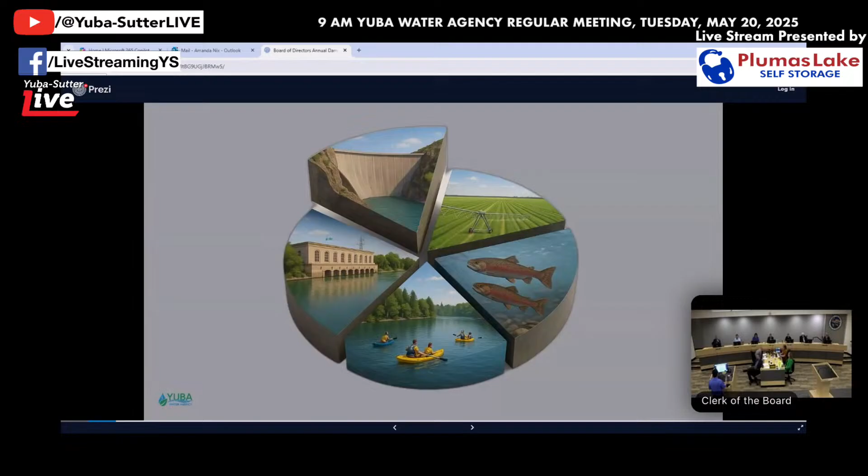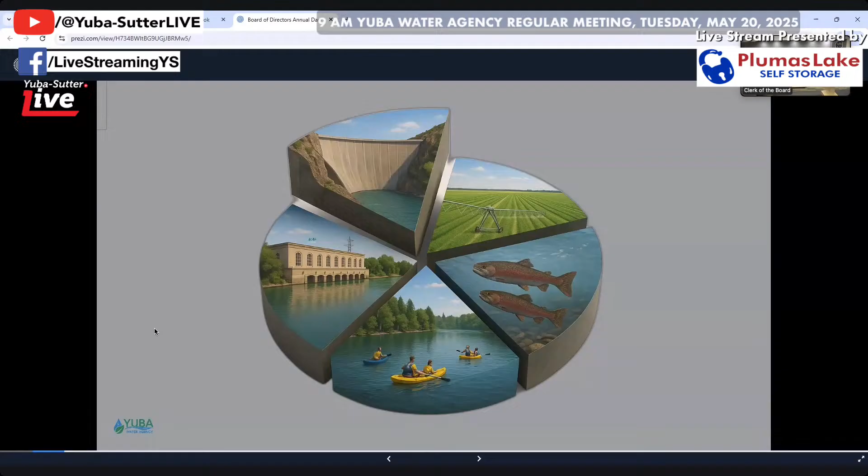This is a fun little depiction of the primary benefits of the agency: hydroelectric generation, recreation, fish enhancements, water supply. But the primary reason, as everybody knows, the agency was built was for flood risk reduction, provided by the dams.

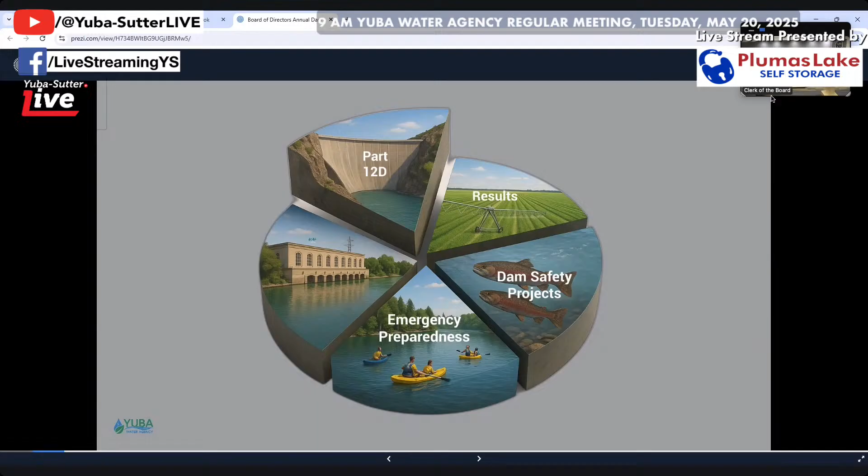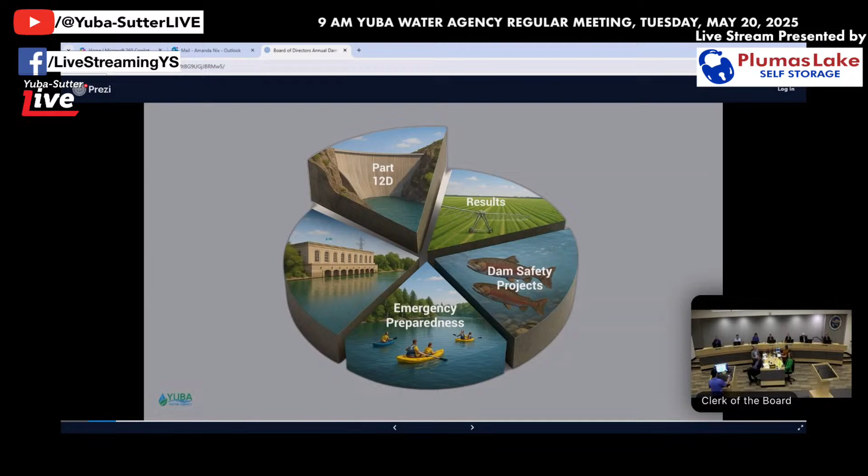So the agenda for today will be for me to review the Part 12D inspection, and I'll go over what that is, the results of those inspections, dam safety projects that have been done in the last year or so, plus future projects as planned, and a quick overview of where we're at regarding our emergency preparedness program.

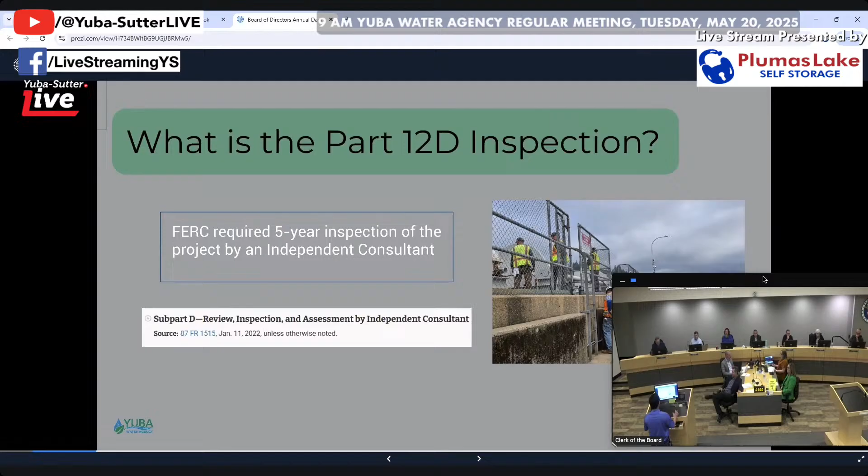So what is the Part 12D inspection? Every year we do inspections required by our regulators: the annual Division of Safety of Dams inspection by the state, the annual Federal Energy Regulatory Commission, or FERC, inspection, plus our own internal inspections. This is a special inspection required by FERC, where we, as a licensee, have to hire an independent consultant, a third-party person or team, to come out and inspect our dams, facilities, and the entire project. It occurs every 5 years, and it's called the Part 12D inspection because it's codified in the Code of Federal Regulations, Title 18, Part 12, Subpart D, hence Part 12D. It's shown there in the picture, looking at the spillway during that inspection.

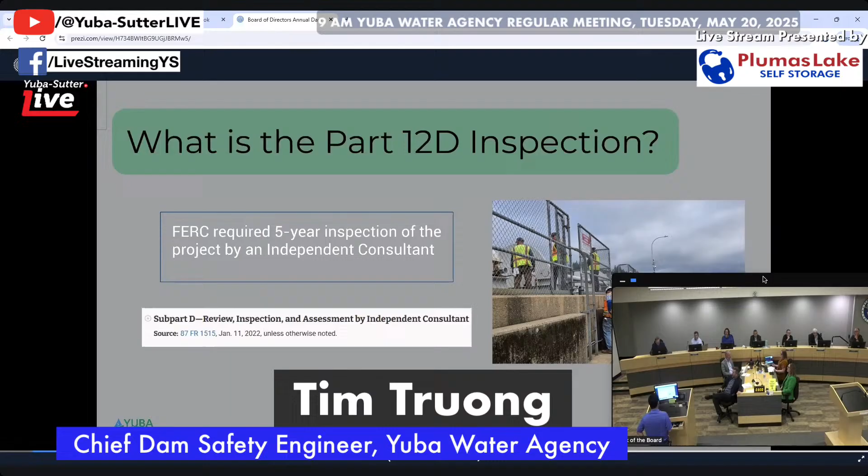What's special about this past Part 12D inspection compared to others is that recently FERC changed how all licensees do this Part 12 inspection. Instead of the previous format, now they categorize each Part 12 as either a comprehensive or a periodic inspection, and those alternate every 5 years.

One year you may have a comprehensive inspection, and the next 5-year cycle following you'd have a periodic. The difference is, as the term implies, a comprehensive means the independent consultant is looking at everything, whereas a periodic is very scaled back, similar to an annual inspection, but done by that third-party consultant.

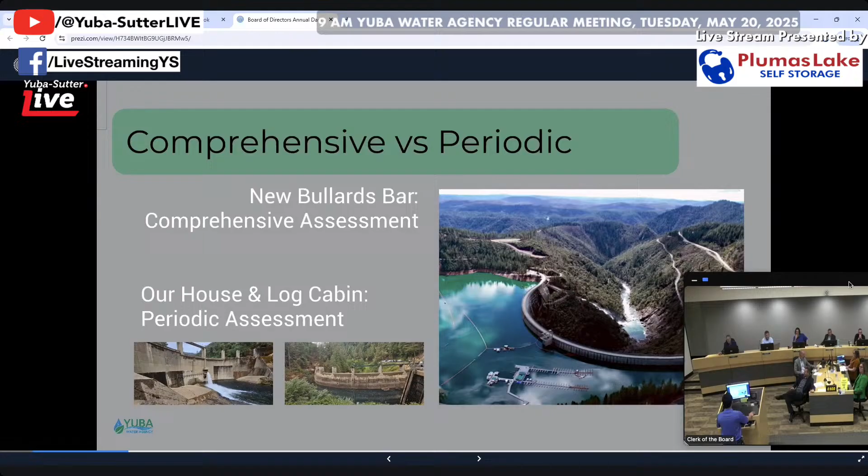For this past year, we did a comprehensive inspection. New Bullards Bar was tapped to conduct a comprehensive assessment. Our House and Log Cabin were periodic assessments, lesser in scope. For the periodic inspection at Log Cabin and Our House, we conducted a regular on-site inspection, but also did a full tunnel LiDAR scan of the entire tunnel for both diversion dams. This is an important milestone because it's the first time those tunnels have been fully inspected in over a quarter century—last time was in 1999. Good to have that information.

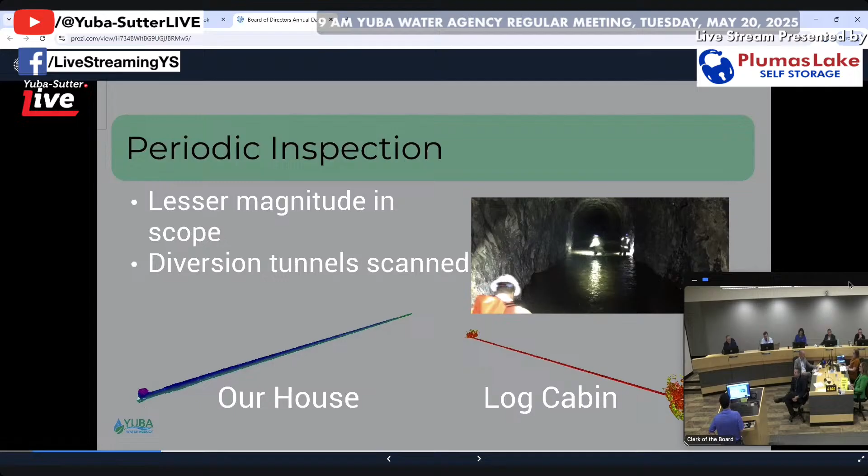The comprehensive assessment is the big one. We received the notice 18 months ago, so a year and a half ago is when we began, but in actuality we started working on it beforehand. Interestingly, based on feedback from licensees, FERC is considering extending that initial notification out to 2 years, 24 months, because many licensees were asking for more time to do this inspection—that's how big and resource intensive it is.

So the IC did a deep dive of the various documentations. It looked back to the design basis and all the analysis and the records that we have on the project. We did a site inspection. We conducted a probable failure mode analysis.

And the big difference between this Part 12 and others is this level 2 risk assessment. So the FERC is moving towards looking at risks associated with the project instead of just failures or failure categories as they have in the past, by moving away from deterministic to probabilistic approaches.

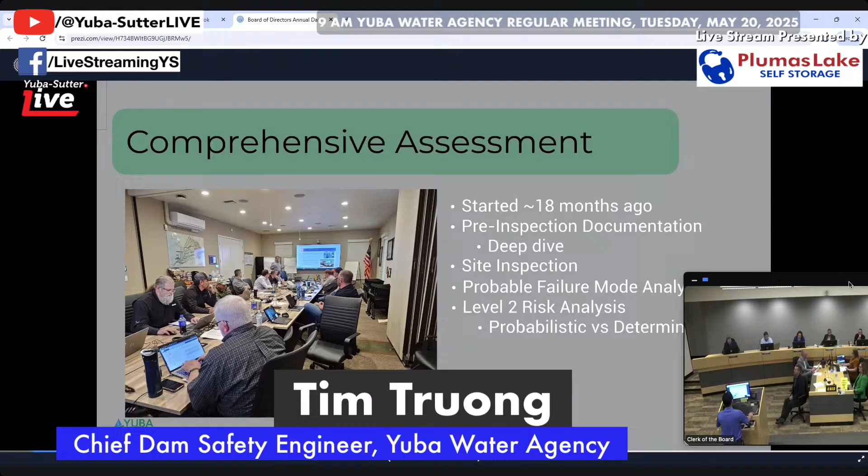And I say this not only to make myself sound smarter, but to also try to inform the board of really the scale of what that entails. Because in the past, when you look at deterministic, it's looking at a single point. So you consider the maximum flood, you consider the maximum earthquake. That's your value when you're looking at a failure.

Whereas in the probabilistic world, those points are just a probability, a single return period, a 1,000-year flood, a 1,000-year earthquake. But we're considering failure and events beyond those, so we consider all the range and spectrum of probability. So that's a lot of work and a lot of data that needs to go into that.

Hence, the amount of resource that's taken to do this work. And just for comparison, for this assessment, for just Bullards alone, this year it's over $1 million. Whereas last time we did it in 2020, for all 3 dams combined, it was about 200,000. So that's the amount of work that we've put into this work.

That's a new requirement at FERC, yes. Thank you.

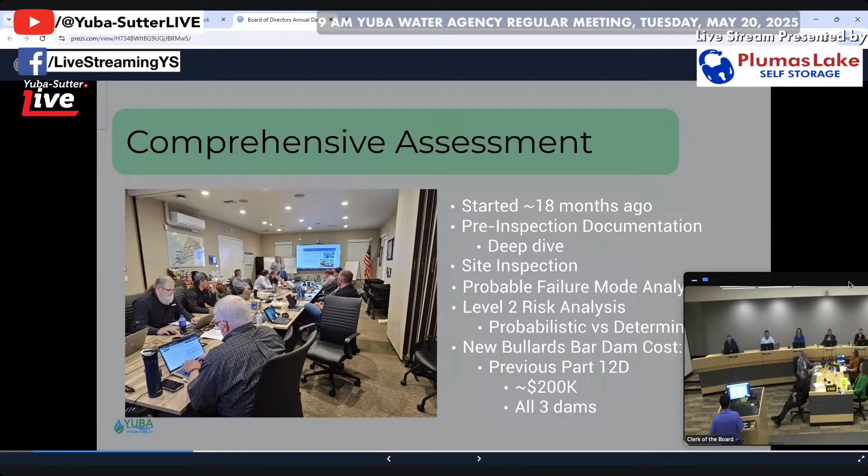Okay, so results. What did we get out of the assessment? So Log Cabin and Our House, this is the periodic assessment. The independent consultants stated in the report, the project is judged as being suitable for continued safe and reliable operations. So project's good for Log Cabin and Our House. There were a few recommendations, minor recommendations that we're going to follow up, but I don't plan to go into details here. If you would like more information on that, I can certainly set up a closed session to discuss those details.

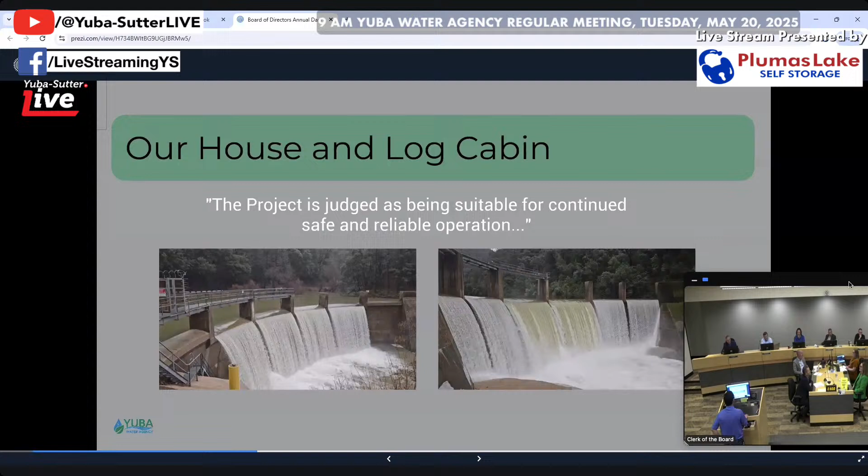Can I ask a question? Is in the dam on the left, is that the low water outlet open? Yes, it is. Actually, it's same. Actually, I take that back. I don't recall it for this picture, actually. I want to say it was because I think we took it during our annual testing, so I think it was, but I have to go back and look at the dates for this. Usually when it flows like this and the low level outlet is open, you can't even see it because there's so much water.

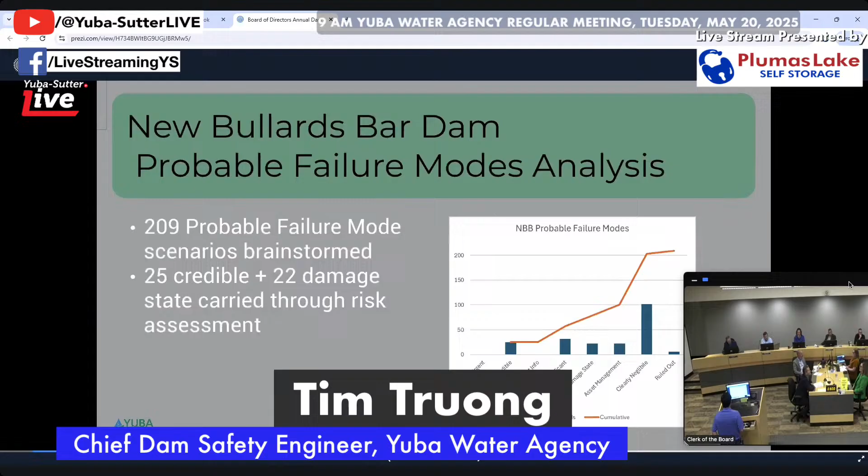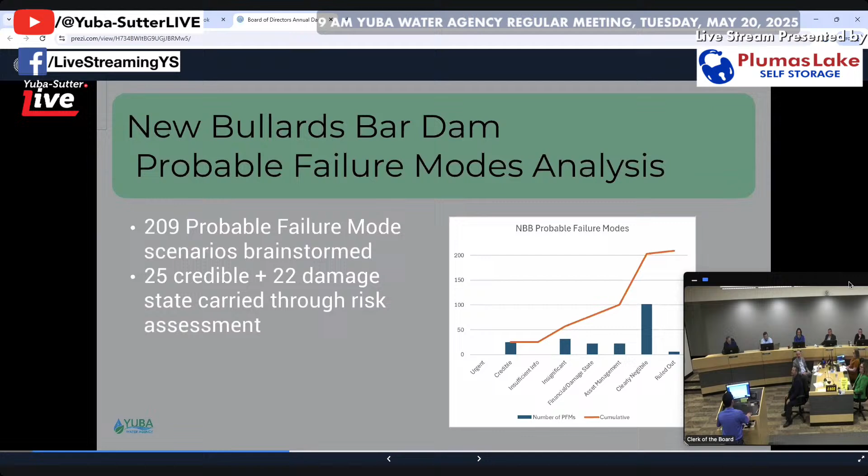So Bullards. For Bullards, as part of that process, we conducted the probable failure mode analysis. This is where a bunch of experts sit in the room and talk about all the ways the dams can fail, which as the dam safety engineer is one of the most harrowing experiences of my career, where all the experts talk about how your dam is going to fail.

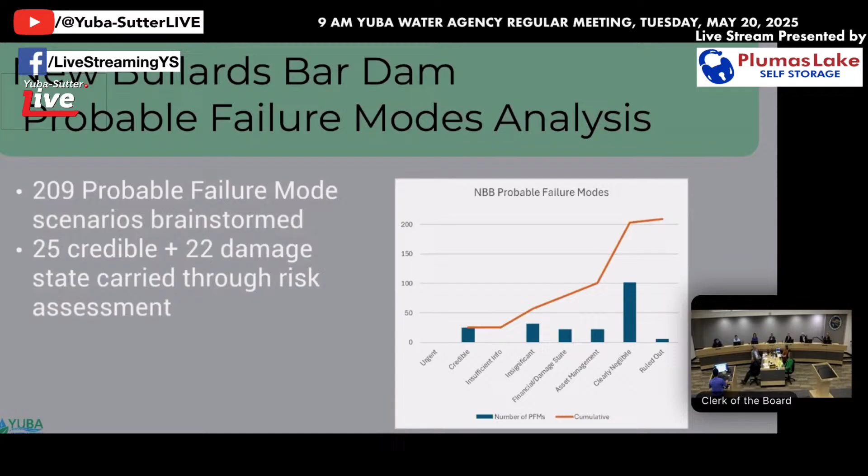We postulated 209, we brainstormed 209 different failure modes, which is a lot. All those 209, 25 were considered credible, and 22 were considered a damage state scenario to be carried forward through that risk assessment process. And you can see that chart there, just the cumulative, all the categories associated with the different failure modes.

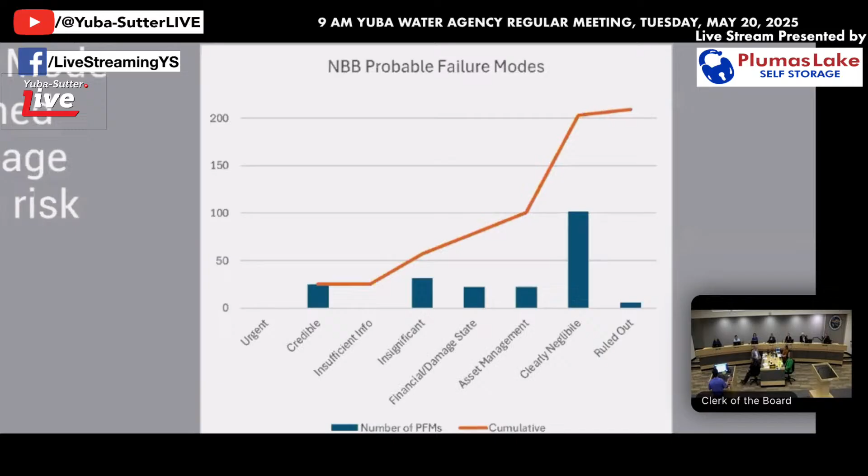What's a tall one? Clearly negligible? Clearly negligible, yes. So that's when deemed that the probability is so low that it's negligible. Okay. There's also a last category ruled out where it's just improbable. Okay. Didn't sound good for us.

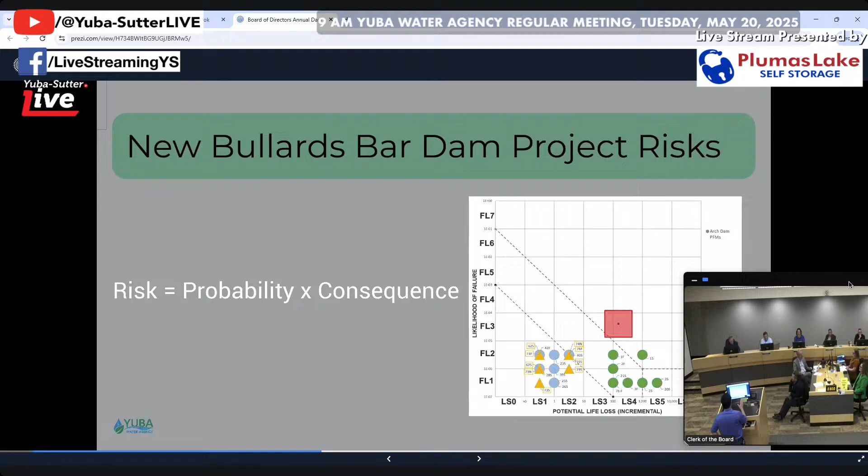So this slide is one slide that I was debating whether to present because there's a lot of information on this slide alone. This chart is complicated, but I thought it was important to show the board this chart because it really is the culmination of that whole year and a half long process.

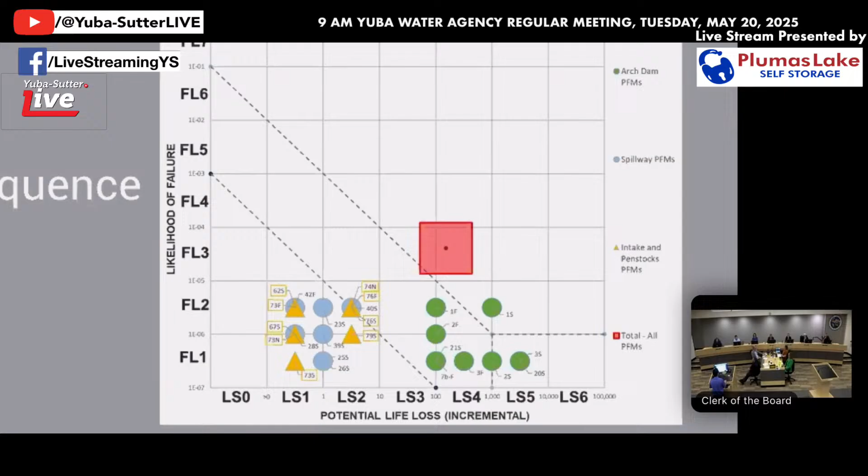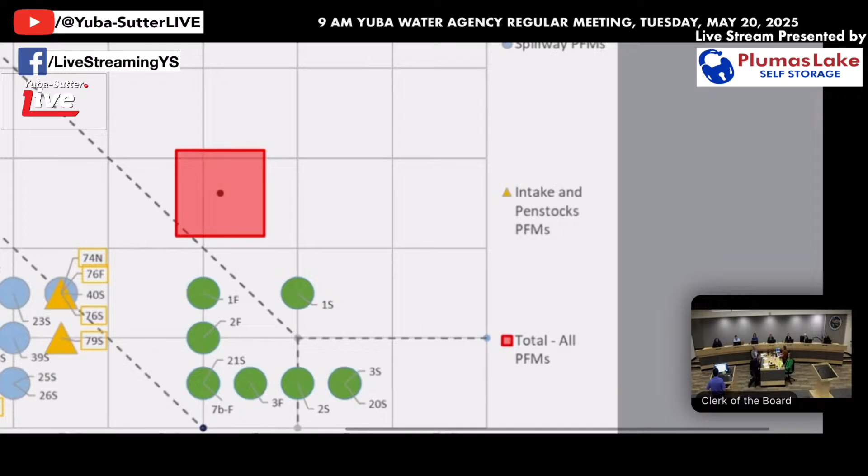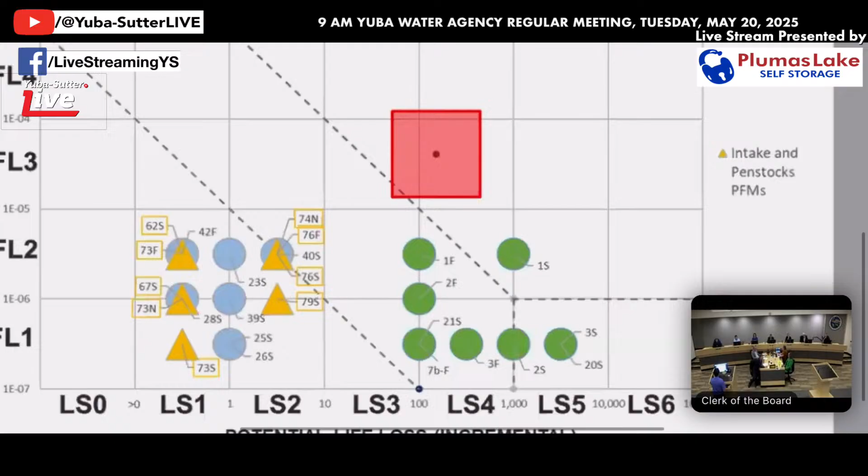So risk is defined as the probability times the consequence of that failure. On the chart here, the y-axis is the likelihood of failure or the probability. And one thing to note is that each of those horizontal lines is in the scale of order of magnitude. So this is not 1, 2, 3. This is 10, hundreds, thousands, 100,000, million. This is a 1,000,000-year return period.

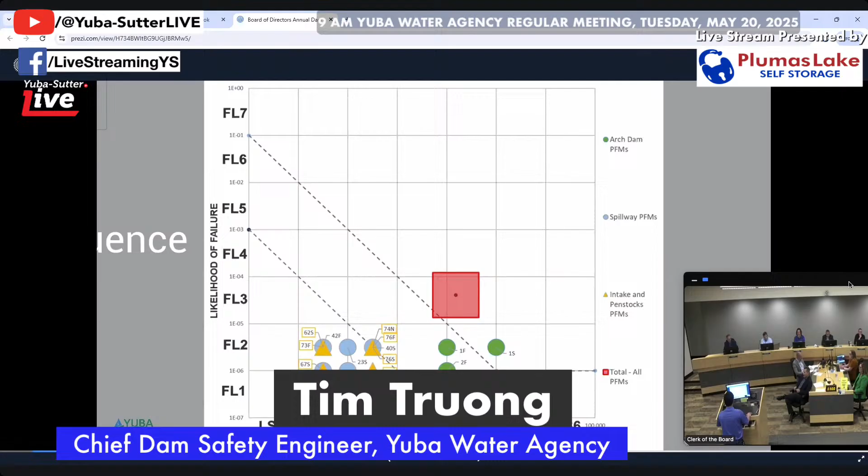For reference, we look at the levees here around Marysville and Yuba City. They've recently been designed to a 200-year flood. We're talking about 100,000-year floods here. So that gives you a little perspective on the likelihood of these failures. And then the x-axis is the consequence of the failure itself. Bullards being what it is, the consequence is massive, as we're all aware.

So how do you read this chart: all these circles and triangles are the different failure modes we've hypothesized, plotted based on their likelihood of failure and consequence. We add up all those risks, and we get to that dot and that red box. That red box is our total project risk.

What the industry has defined is that top dashed line as the tolerable societal risk line, so you want to be below that line. As you can see, our total project risk is slightly above that line. What does that mean for us? That means FERC is going to be looking for us to take actions in the coming years to try to reduce that risk, so we have some work to do.

We can reduce that risk by getting more information to decrease the likelihood of failure, or to reduce the consequence of that failure. There are different ways you can do that.

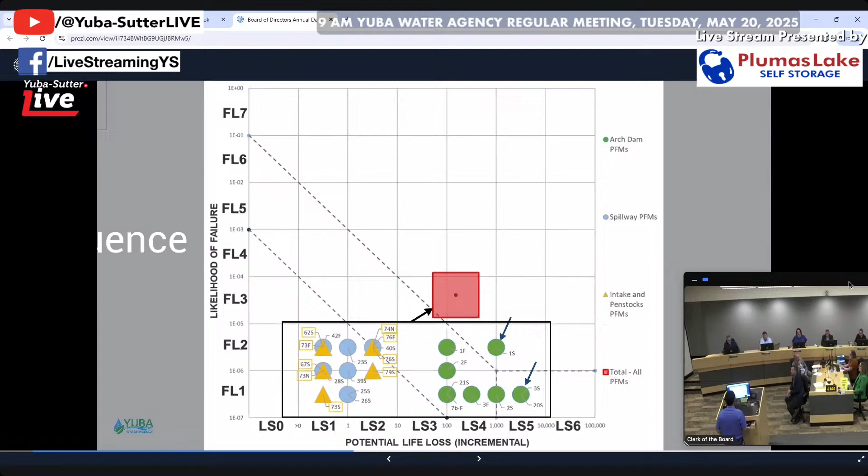And again, because it's cumulative, the top three failure modes that I've pointed out contribute to about 85% of the risk score. So if we reduce those three risks associated with those PFMs, we'll reduce our total project risk.

Could you detail the three risks just briefly? I can do that in closed session. That's considered critical energy infrastructure information, and I'm not supposed to share that in a public session, but I'm more than happy to present a more detailed analysis and information. Through the chair, I'd like to add that to a closed session in the near future.

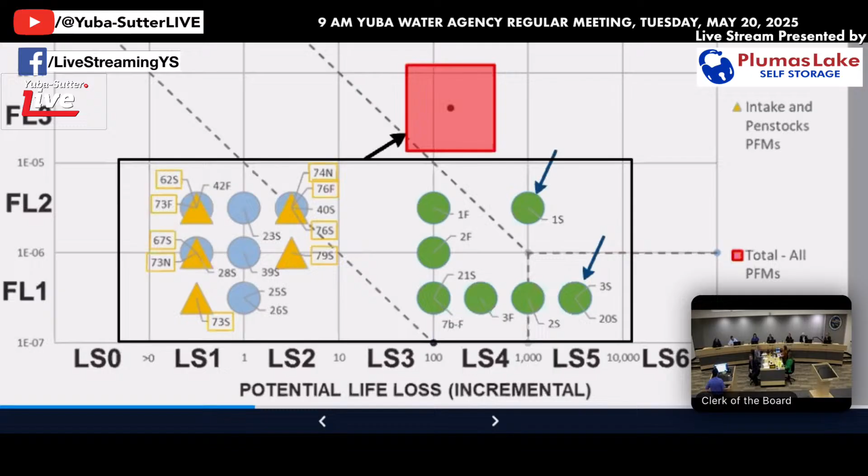So in conclusion for Bullards, we had 18 formal recommendations from the independent consultant. However, the bottom line is that they judged the project to be safe for continued operation, and they said we do a great job. We're very committed, and they're impressed with our commitment and the operator's knowledge of the project. But there's definitely more work to do to follow up on that.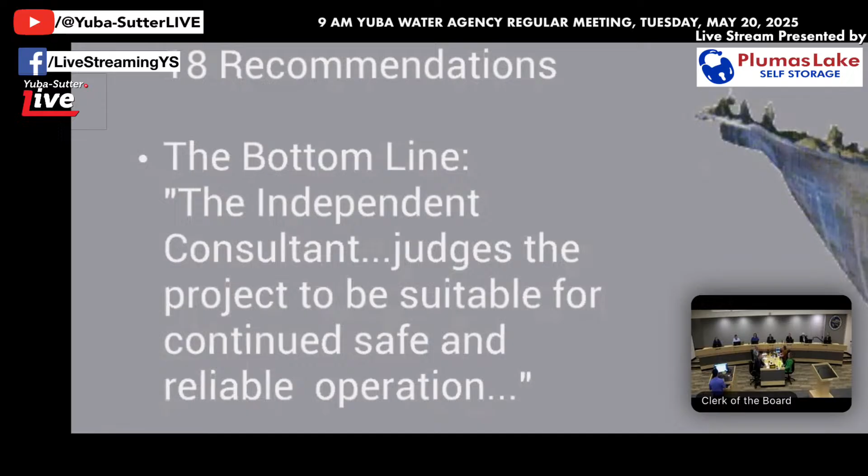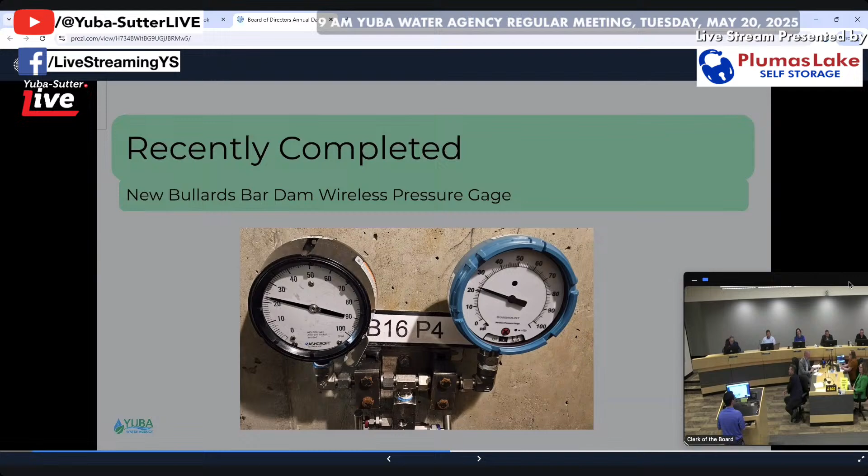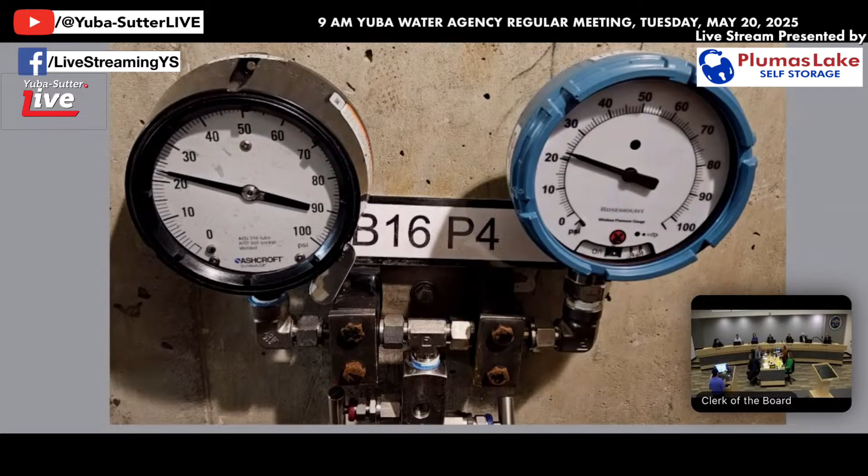Moving forward to dam safety projects: we completed an upgrade to our uplift pressure gauge inside the dam, inside Bullards. Prior to the upgrade, operators were going out there once a week to read the uplift gauges. We recently installed wireless gauges that connect back to our SCADA system, so we can review the water pressure under the dam in real time now, which is really great.

We completed some repairs on the road on the crest of the dam itself. Several of the old patches were failing, and we had various cracks historically, so we've repaired those spalls and sealed the cracks. The road turned out really great, and it should be open this week, or was last week, at the end of last week.

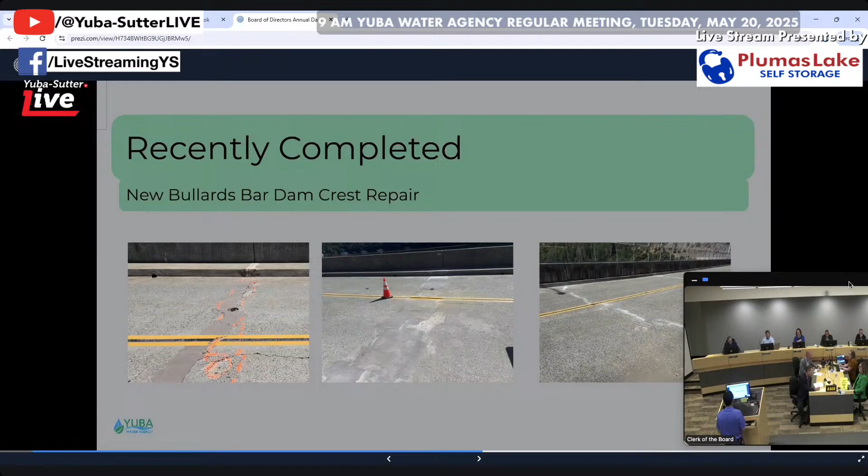And then, of course, we have lots of follow-up work to do following the recommendations from the inspectors: analysis to do, looking at the various loading events, and potential instrumentation upgrades as well.

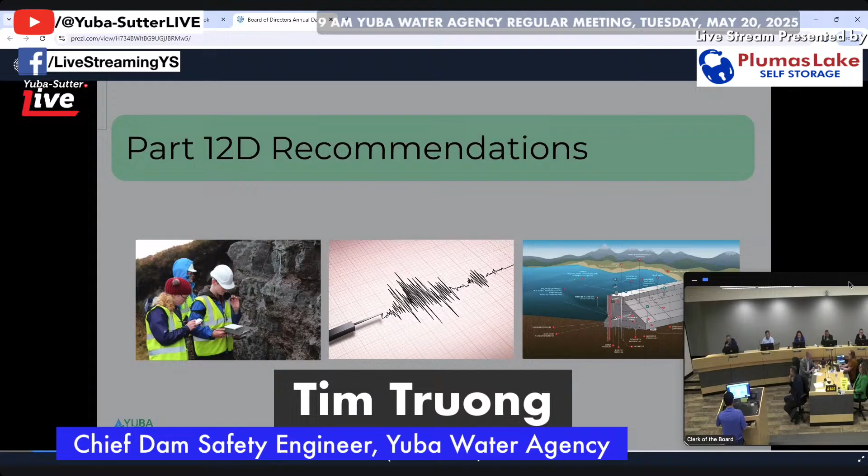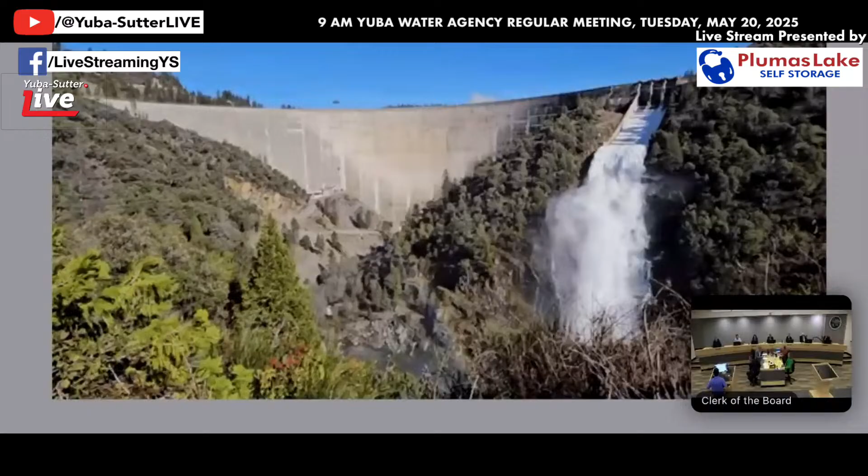Spillway repair is another big project looming on the horizon. When we did the spillway repair project on Joint 3-4 a few years ago, we identified a defect in the spillway. Right now we're reviewing our options about the best way to approach remediation of that defect. To be determined—we've sat down with our consultant a few times to discuss all the options and the best way to approach this without the repair making it worse. We're trying to find out what the best repair option is for us.

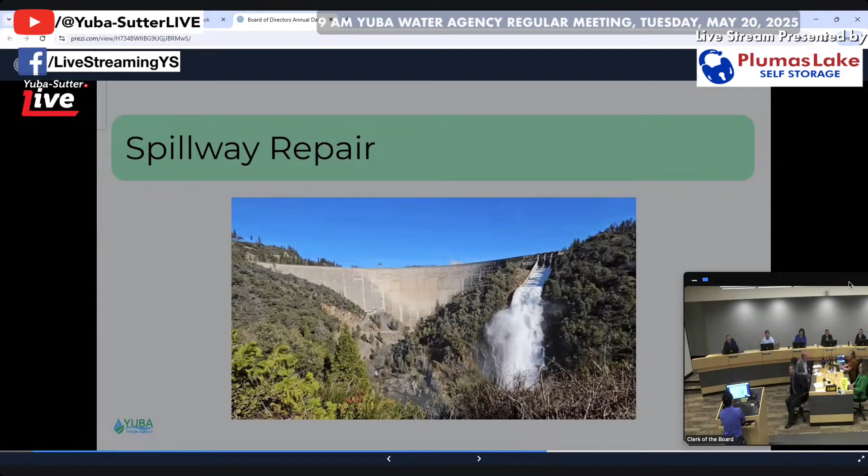Yeah, thanks, Willie. This is not a foundational issue. The defect is that we found some reinforcements and rebars that were corroded just through wear, normal use of the project. So we're trying to determine whether to replace those reinforcements with rebar, or whether in some places we don't need to replace them because we have great support, or the thickness of the concrete is massive and we don't need to do that work. So we're trying to determine the exact scope of that repair.

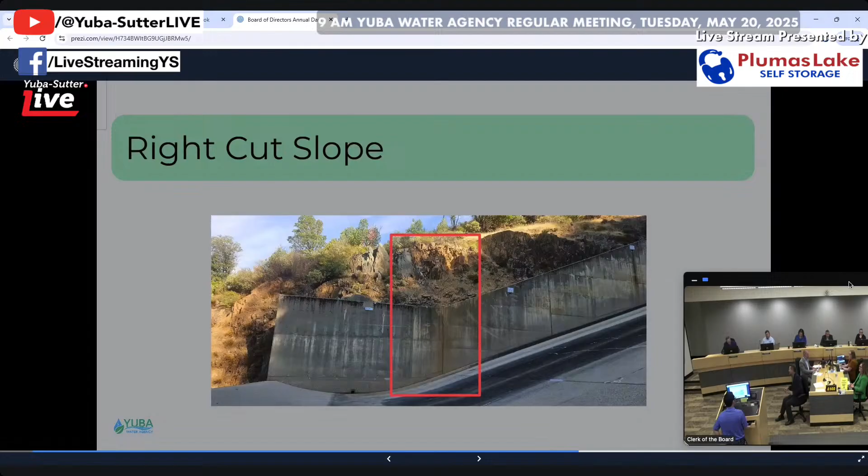Right cut slope clear. This is an issue that's happened since the start of the project. On the right side of the spillway wall, we have some debris that continues to fall down. So we're looking at a larger mitigation of that debris so it doesn't damage the spillway when it falls in.

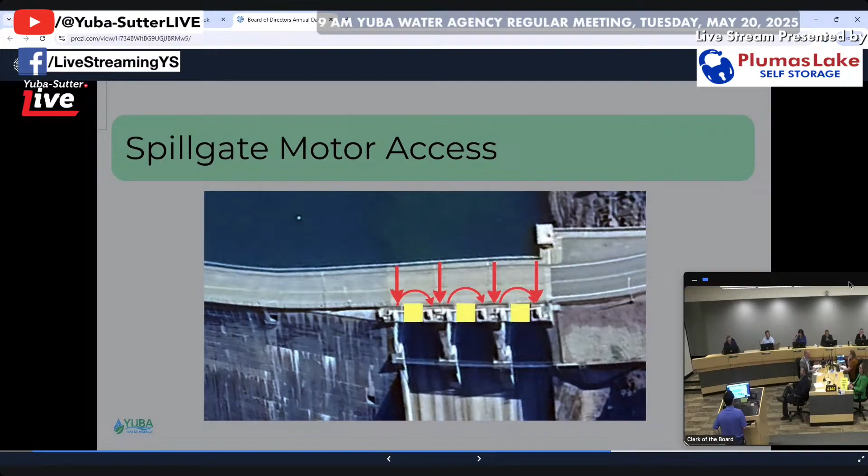Access for the gates themselves: currently, the operators and maintenance crew have to cross the road when they do work on the gates, or when they go from gate to gate. So to improve personnel safety, we plan to install some platforms between the gates so they don't have to worry about vehicles when they're trying to do their work.

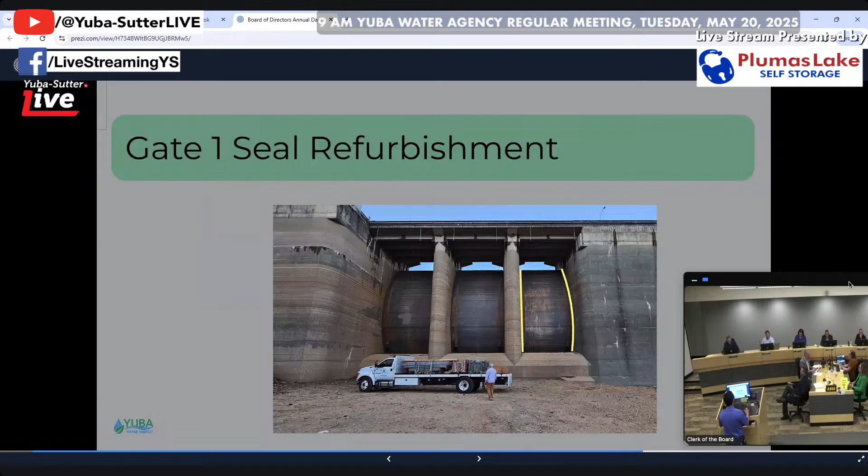Gate 1 seal refurbishment - we're planning to replace the side seals of spill gate 1 next year. We're about 60% designed for that right now.

New instrumentation at Lake Francis - trying to install some piezometers and downstream weirs to better monitor seepage.

Over the next year or so, we need to update our inundation maps for the 3 dams. FERC has recently accepted the probable maximum flood for Our House and Log Cabin, so those maps need to be updated, as well as the Bullards Bar maps, which need to be reviewed and updated as well.

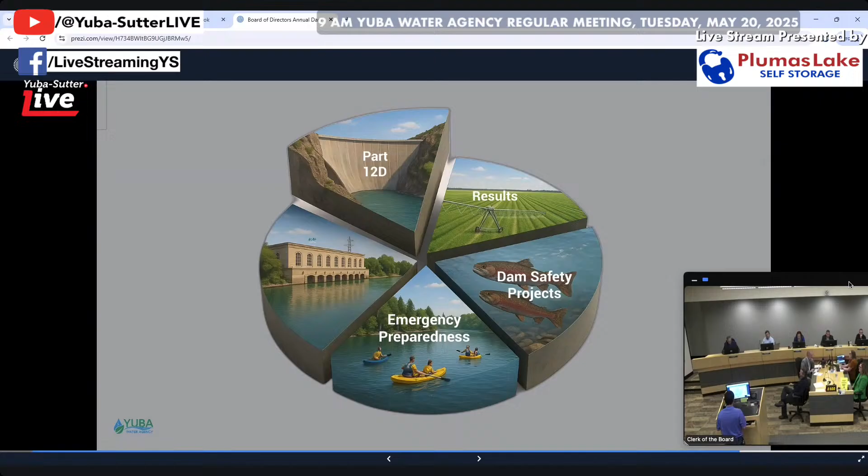The inundation maps lead us into my last topic, which is emergency preparedness. As part of emergency preparedness, we have an emergency action plan documented with inundation maps, so those maps will be updated in our EAP.

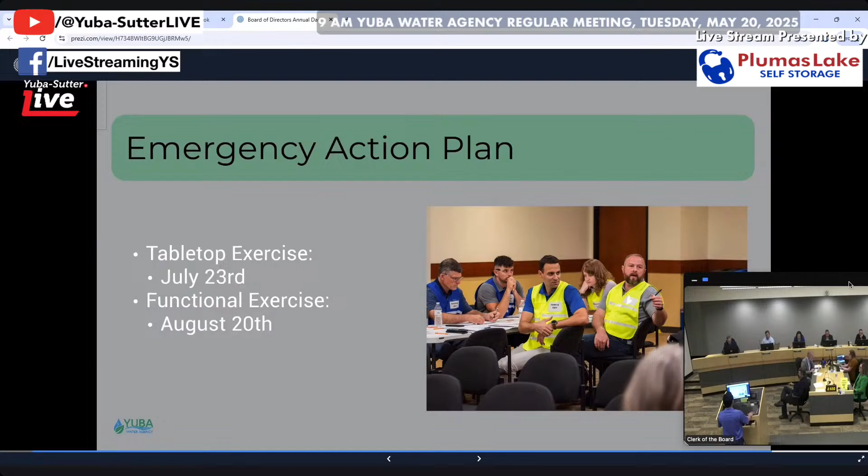Along with that, we have a tabletop exercise for our EAP on July 23rd and a functional exercise on August 20th. This exercise is a big one - we are coordinating with all the local emergency responders: the sheriff, police, National Weather Service, Cal OES, and all the various organizations that may help us respond. We've sent out the invites, and they are more than welcome to attend. We want them to attend so that we can have that communication and coordination.

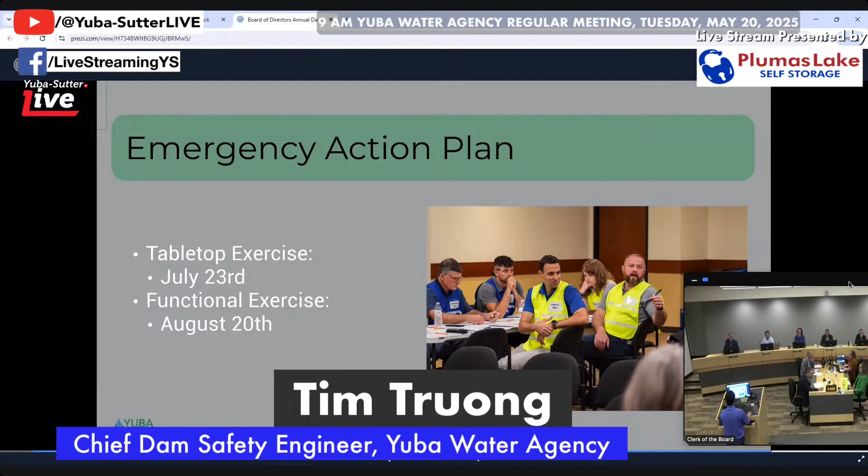And then, I want to make the board aware that we are continuing work on our notification system, which we recently implemented through OnSolve. This system allows us to mass notify the organizations and people that we want to or need to, instead of making physical calls down a phone tree, which takes over half an hour. This will allow us to do a mass notification simultaneously and greatly reduce the response time.

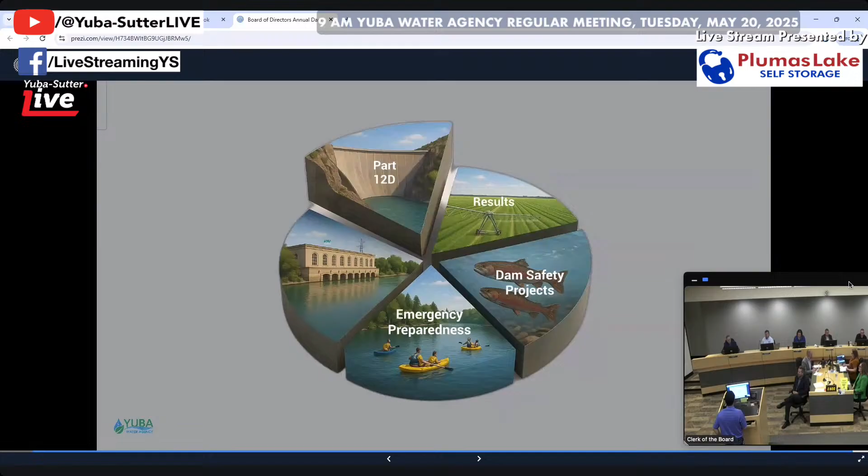And that is it for my presentation. Are there any questions? Are there any questions from the directors?

I have a couple. Tim, first of all, you have an incredible responsibility, and I always feel confident that when you come in and give your reports, you take that responsibility very seriously. I can't imagine what it would be like to sit with 22 of your peers and be reviewed - that makes us feel comfortable too, that we got good ratings from all of them. One thing I'm curious about: since the dam was designed and built until now, how has seismic design changed, and has that had any effect, or will it in the future?

I don't know if seismic design itself has changed. I think the knowledge we have on our site and the information that goes into the design has increased. As the geologists do more studies and understand the site-specific information, it changes the proposed design criteria. For example, when the dam was originally built, they had a seismic design criteria of about 0.15 G, the force of gravity, so the acceleration on the dam was less. Our current criteria is, I think, 0.2 G from DSOD, and there are various seismic criteria we need to follow. Even with recent recommendations from the Part 12, the independent consultant recommended that we review potential site-specific information, looking at the ground and composition of the ground, to get a better value for what should be used for our dam.